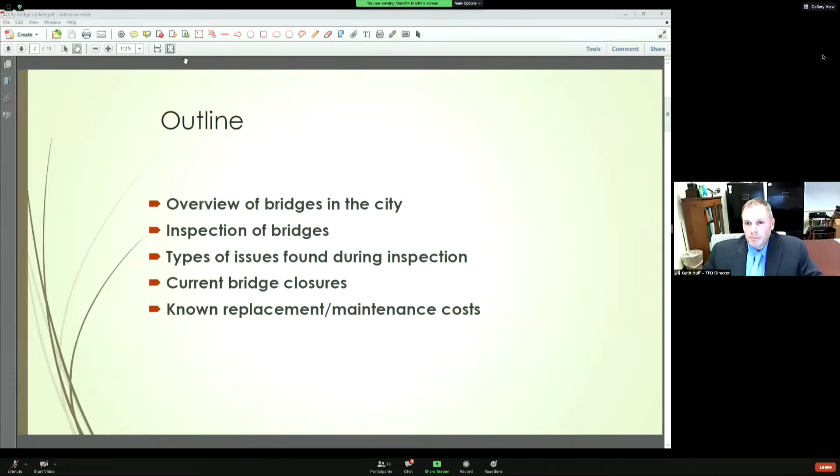So basically we currently have 54 bridges on our road network that we have maintenance responsibility for. This doesn't include your smaller pipe systems that happen to cross city maintained roads or NCDOT maintained bridges. It's just what we have as far as true larger span bridges, 19, 20-foot larger span structures that either span another road, creek or stream, railroad, etc.

So the age of our bridges varies dramatically. We have bridges that were constructed in the 20s, and then we have bridges that were completed basically in the last couple years. I think Glade Street has the distinction of being our oldest bridge that's currently in service without a total replacement or major overhaul, and it was constructed in 1919.

The type of bridges, the construction, the materials vary greatly as well. We have wooden bridges. What you see in the photo to the right is the High Cliffs Bridge. This is one that we worked on about a year and a half ago. It is the sole ingress-egress for 16 property owners, and it is a wooden timber bridge. We have bridges made of concrete, steel, all different types of materials, all different styles of construction as well. All right, Meredith, please move forward.

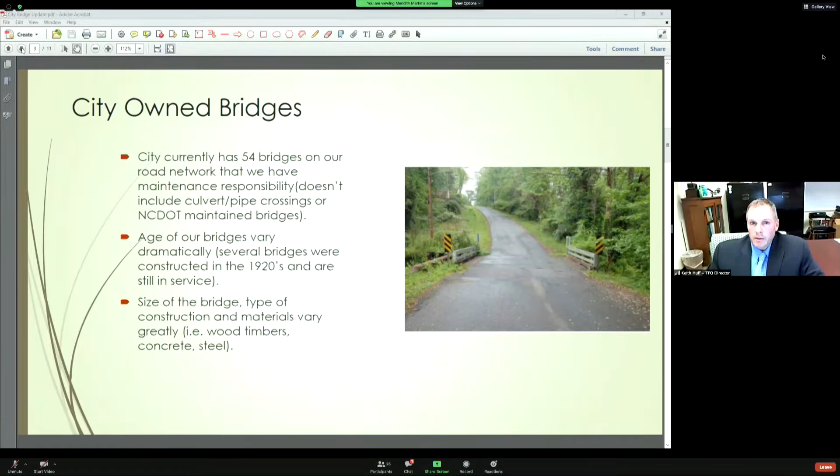So the inspection process: every 2 years a bridge should be inspected as part of the normal rotation and process. A condition rating is given to each bridge, with 100 being the best possible bridge, that is a newly constructed bridge with no issues, down to 0, where it's not functional at all. The inspections are conducted by a contracted inspector under the purview of NCDOT. This latest round of inspections was conducted by an engineering firm called Alpha and Omega.

These inspection reports are top to bottom. They look at drift under the bridge, they look at paint, they look at everything, all facets, superstructure, substructure, to yield this rating. And based on the rating, the local government gets feedback to either post weight restrictions, close the bridge, issue priority repairs, or whatever the findings dictate.

The picture on the right side of the screen is a photo of Old Greensboro Road Bridge before the closure. This particular bridge was posted prior to the last inspection report, limiting the weight coming across the bridge. And this has happened to several bridges across our community.

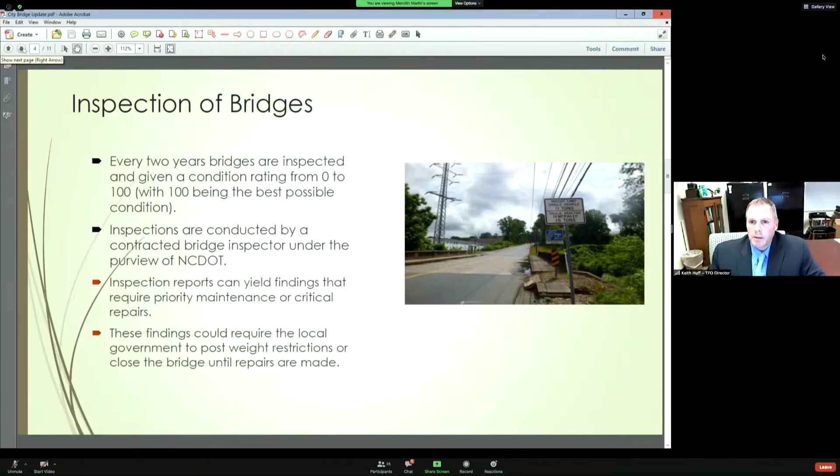So, issues found during the inspection process. Corrosion, as you would guess, is a huge issue. Corrosion of the steel support beams. The top right is a photo of one of the beams under Old Greensboro Road Bridge. Literally, you can stick your hand through the I-beam here. So severe corrosion of these beams. That's why they need to be replaced.

Spalling of the concrete that is in the support structures. When the concrete chips away, it exposes the steel reinforcing that then in turn starts rusting, and that loses the structural integrity of the bridge. The decking on the bridges can also spall and chip away based on salt that we put down during snow and ice control, or just wear and tear from normal vehicular traffic.

Drift and debris. During big storms, you can have large amounts of debris that build up on the front side of the bridge that causes undermining of the support structures. And also, this drift can affect the wing walls or the side support structures of the bridge and cause failures or cracking or damage.

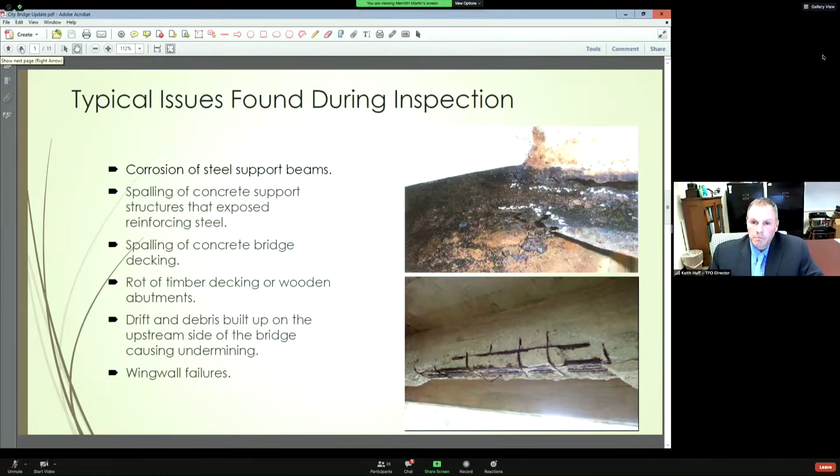So based on the current inspection reports, we have developed a list of the top 15 maintenance needs. These are priority maintenance items that came forth from the inspection process. You can see there's a number of different bridges, various wards that have these corrosion issues, spalling issues, beam repairs, etc. And you can see on the right-hand column the maintenance costs vary significantly from one bridge to the next. But the take-home point here is we have about $1.3 million of known priority maintenance cost for our top bridges that have come forth with this latest round of inspection reports.

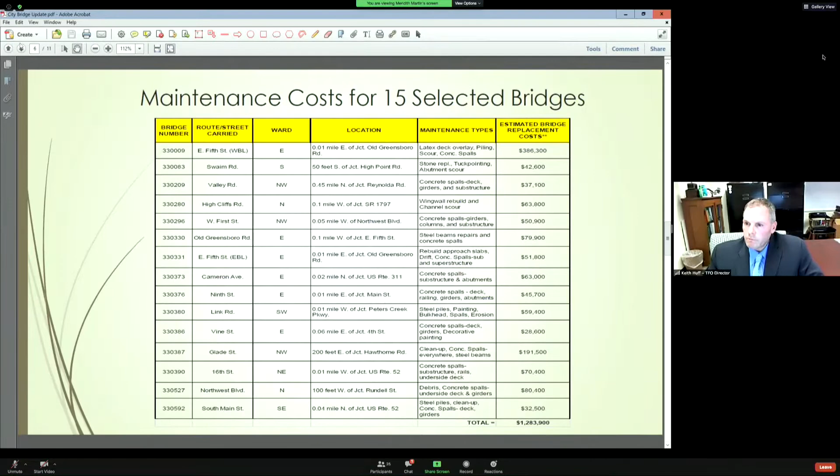So some current closures. This is West Lakeview Drive Bridge. It is in the North Ward. It is a bridge that was constructed in 1964. It has failure of the timber decking, the steel beams, the concrete abutments that are holding the bridge together. This is a bridge that the NCDOT would term as structurally deficient and structurally obsolete. On the bottom right-hand photo, you can see that the bridge is totally overwhelmed in a storm event. This happens to be a photo that was taken this year. So the intersection, the bridge, and the adjacent road are overwhelmed in the storm event.

It has a structural rating of 22.74. Anything that gets in the 40s is going to be considered a structurally deficient or structurally obsolete bridge. The approximate replacement cost here is around $1.8 million because the bridge has to be raised along with the intersection. And currently there's no funding source that has been identified for the replacement of this particular bridge.

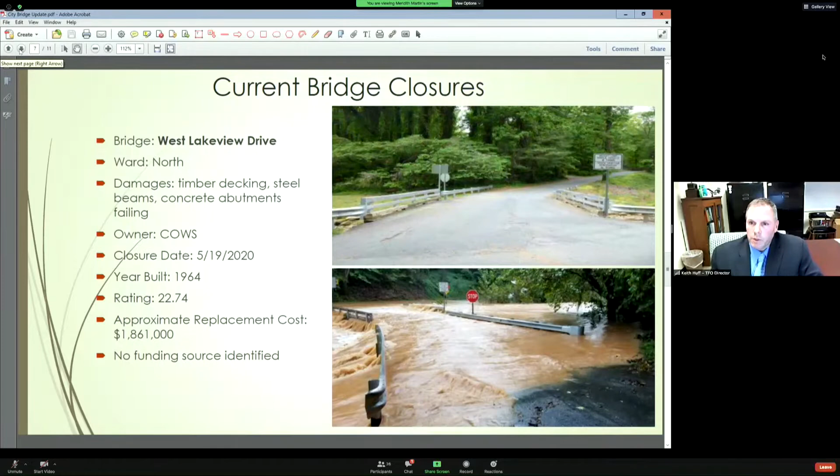Next bridge, probably everybody's aware of this one. This is Old Greensboro Road Bridge in the East Ward. Basically beam failures here on the eastbound travel lane, and the concrete deck is of issue here. This was a bridge that we closed in June of this year. It was built in 1950 and has a structural integrity rating of 21. The total replacement cost on this bridge is about $2.7 million.

However, with this bridge being an arterial, we have invoked an emergency fix to replace the eastbound lane beams of the bridge to get it open to travel. So our contractor's on site right now, and they are replacing the beams on the eastbound travel lane. Construction window for this fix is about 5 weeks, give or take, weather permitting.

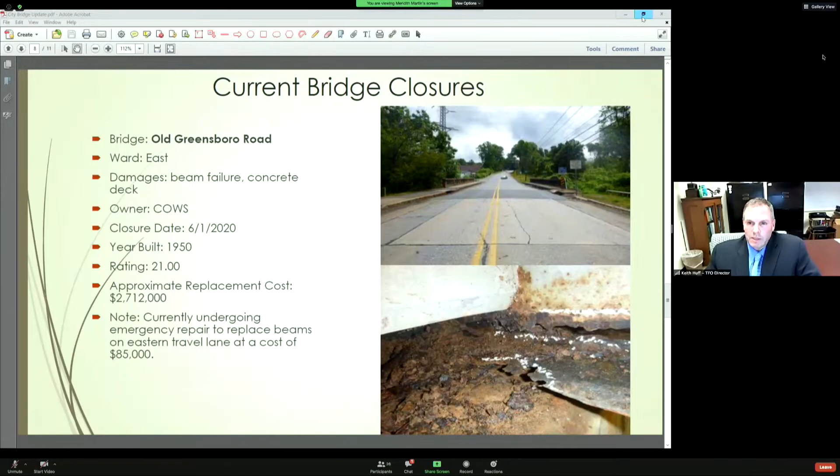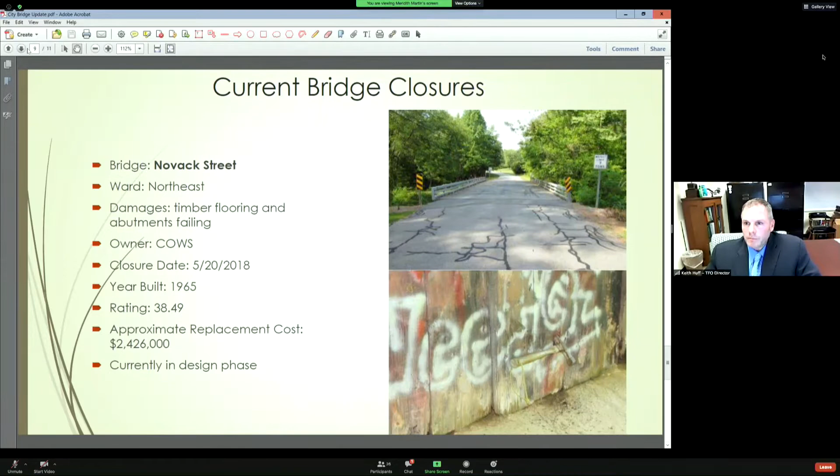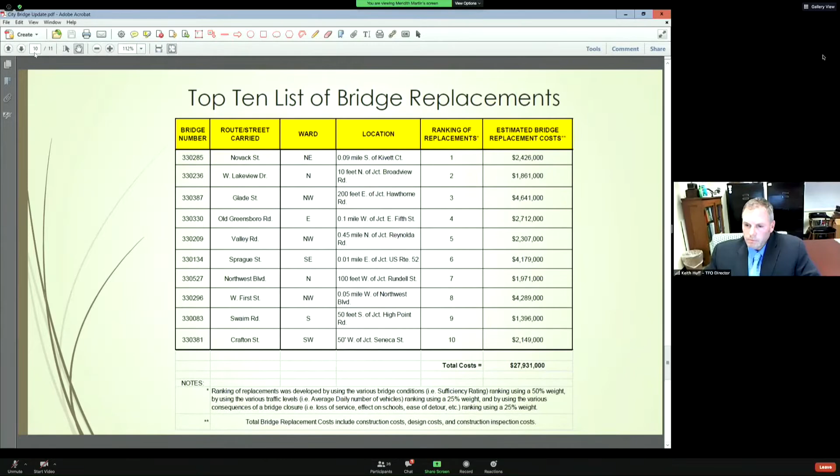And with that, I'll be happy to answer any questions. Thanks, Meredith. Appreciate it.

Thank you. Are there any committee questions or comments? Councilmember Parman.

Thank you, Mr. Chair. So with the Novack Bridge being closed for two years and it's already in the design phase, what's the wraparound time? How much longer is this bridge projected to be closed before the residents in that community can use it again?

Yes, ma'am, Councilmember Parman, I would guess with the procurement process, the construction, and the completion of the bridge, I would guess a year until it's fully open to traffic again.

Okay, thank you. As I recall, this was accelerated through the funding process in order to cut the wait time as much as possible. Am I remembering correctly? Yes, Mr. Chairman, you're absolutely correct. Thank you.

Yes, I believe Councilmember Scipio. Yes, Mr. Chairman, and thank you, Mr. Huff, for the wonderful report. I have been speaking with Mr. Taylor, and I think it would be wonderful if we could prepare the master list of those 54 bridges and their conditions.